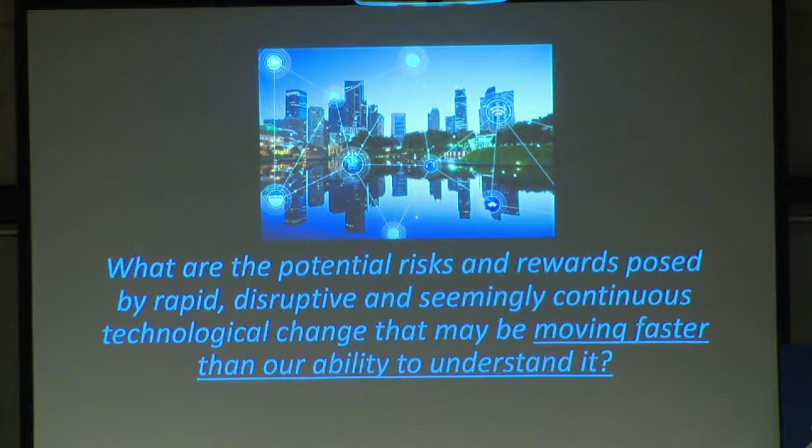I'm going to talk about something that we're living right now. We're living in a time when we have technology that is being used to help us get safe water pipes, help us repair these assets in place, and we need to balance the risks and rewards about how we go about doing this. So as President Daniels mentioned, the purpose of this meeting is kind of balance risk and rewards, talk about the dawn of the technology as well as possible doom if it goes in an uncontrolled fashion. And I want you to keep that in the back of your mind as we go through this talk.

Now, water pipes are critical for the security of this nation as well as others around the world, economic vitality as well as the health of communities worldwide. We rely on water pipes, say here at Purdue University, to provide us water in the dorms, to provide us water at the recreation center, to provide us safe water that doesn't make us sick in other places around town. We also, when we go home, we rely on water for the water parks. Just think of the last water park you went to, and maybe it was filled with contaminated water. Would you go there? Right?

We rely on these things as very important aspects of our society, and they also provide economic vitality. In order for businesses to thrive, they need water. They need to be able to produce, to manufacture, to allow people to come visit the mall, and other aspects of our society. And health of communities, we've touched about before, and it's very easy to realize what happens when you don't have functioning water pipes when you look at the recent hurricanes.

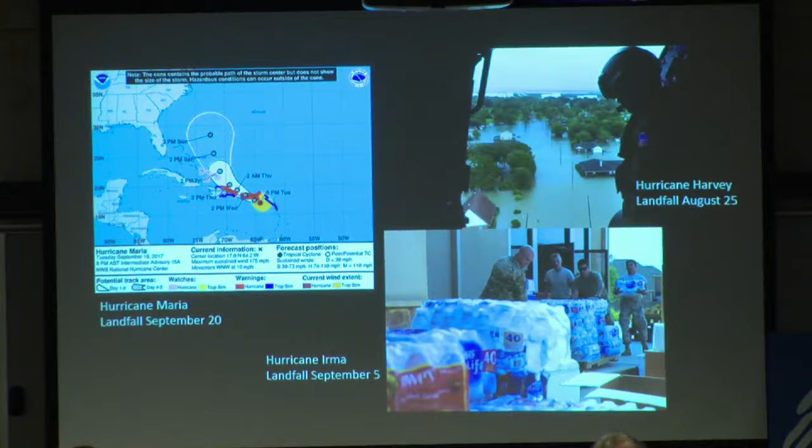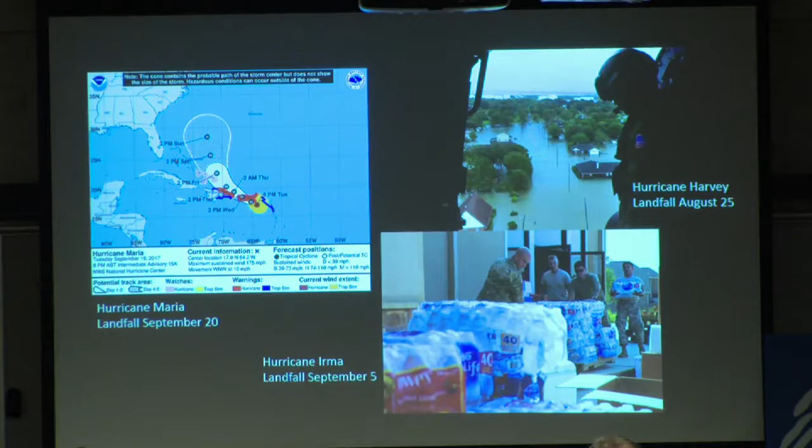Okay? The recent hurricanes that have affected large population centers of the U.S., including Hurricane Maria, Hurricane Harvey, and Hurricane Irma, basically incapacitated water pipes. They filled them up with water, or sometimes there were main breaks, there were depressurizations. You couldn't get safe water to the buildings, and sometimes the sewage in the sewage pipes mixed with the water. Okay? Flood waters went into sewage pipes, and so we realized very quickly in these types of disasters that we really rely on water pipes to convey us safe water that allows us to thrive.

And what you may not know is in the U.S., there are millions of miles of water pipes. Many of these are buried underneath the street or on your property, or they're also inside your homes and inside your office buildings. And these pipes are aging. Many of these pipes were installed in the 1900s to 1950s. And so they're possibly 60, 70 years old. And generally, they're out of sight, out of mind, and we don't really think about it until a wet spot shows up on our ceiling, and we realize that that pipe is now starting to leak.

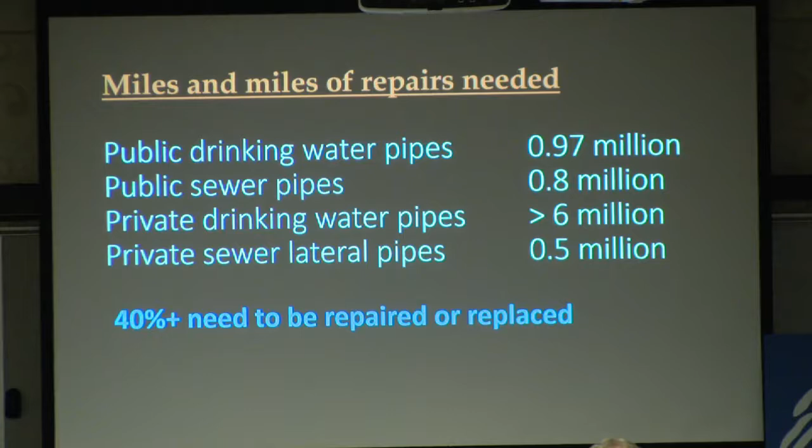Or what we find is sewage starts spilling out into the bay where we used to go play. And we realize that those pipes are starting to leak and damage, and we need to do something about it. Estimates are that about 40% of all water pipes, these are drinking water pipes, sewage pipes, and water that conveys storm water, rainfall when it rains, away from the roadways, need to be repaired, okay? So in my lifetime and in many of your lifetimes, you're going to be responsible for doing this, you, your

friends, and your family. To give you some data, this is a study that was conducted several years ago, and what it was is an inventory of all the buried drinking water pipes in the U.S., what types of materials these were. The materials were steel, cast iron, some of them were ductile iron. And what I want to bring your attention to is we're past due, right? The bills come.

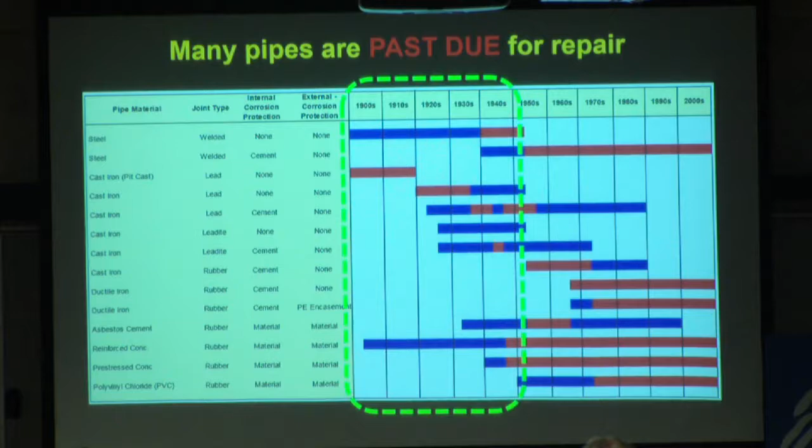We have to repair or replace these pipes here because many of these pipes from the 1900s to the 1950s are still in the ground, are still in buildings, okay? And these can cause contaminated water. They can promote microbial growth and the growth of organisms and pathogens in our plumbing, and these need to be addressed. Now, an often type of pipe nobody really talks about because we take it for granted is stormwater pipes.

When it rains out very hard, the water needs to go somewhere. And preferably, we don't want it to go on the street because we're driving on the street, right? If it goes on the street, you can hydroplane. Anybody ever hydroplaned before? I have hydroplaned. It is scary, right? So we rely on stormwater pipes to basically take that water and send it underneath the street to some other location where it can drain away, okay?

But these pipes also are decaying and falling apart. The issue here is that with these pipes, they go underneath the roadways. And so when you have a pipe fail underneath the roadway, you get a pothole. Or you can have the roadway wash out. So we have public safety issues. The damage can be catastrophic.

And here is the example down at the bottom where we're looking at a corrugated steel pipe. You take metal and you put it in water for 50 years, and with running water, it will erode away. And then what happens is the water isn't going through your pipe anymore, it's going through the soil. And then it's scouring out the soil, and then the pipe can start to mechanically fail.

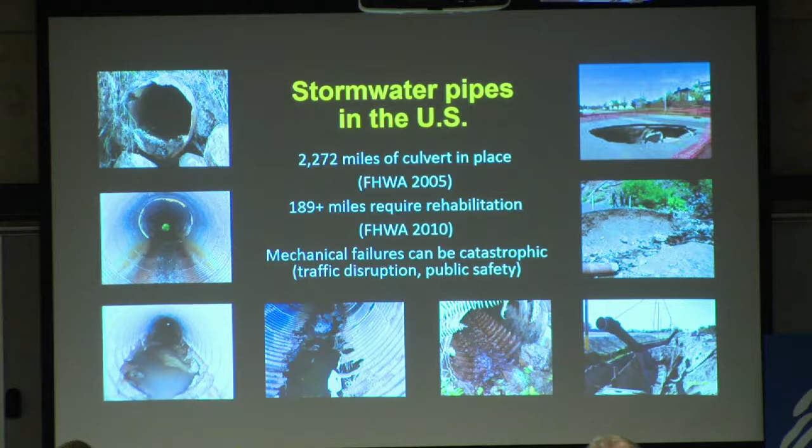So to address these issues, historically what we've done is we've dug up these pipes, primarily because that's the way it's always been. Anybody ever seen pipes being dug up on their street or nearby? Yeah. It can be a pain. It really can. Because, first of all, they send you a letter telling you you're not going to have water for a certain period. Then they're going to tell you that you shouldn't use the toilet, you shouldn't wash your clothes during that time, right? Because they don't want waste and water coming down the pipe to where there's no pipe.

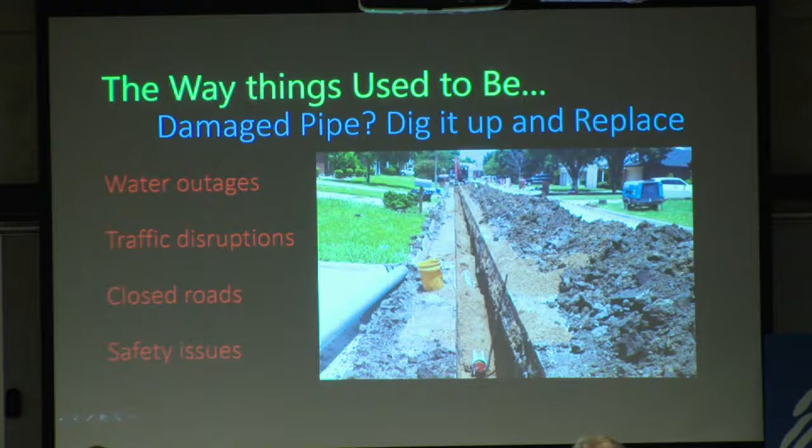Traffic disruptions, try driving a car down that street, right? And so closed roads, rerouting, and safety issues where you have open trenches, where bystanders can fall in these trenches and get hurt, or you can have people at the work site dealing with hazardous conditions. So this is how it's always been until the innovation of trenchless technology. Trenchless technology was disruptive. It still is disruptive. It allows us to repair these pipes underneath the streets and in our buildings without having to rip up all that dirt, without having to remove the walls, remove the drywall.

And there's actually a world celebration tomorrow about World Trenchless Technology Day. Okay? So you Google it, you'll find the website. It's pretty cool.

And one of the most commonly used trenchless technologies in the U.S. is a technique called cured-in-place pipe technology. And cured-in-place pipe technology is the chemical manufacture of a new plastic pipe inside a damaged pipe. So let's say we have a sewer pipe underneath the street. It's cast iron. It looks like Swiss cheese because it's all corroded out. What you can do is insert this liner inside one manhole, pull it through the pipe that's underneath the street as cars are driving over it, and go to the other manhole and see this fabric come out.

Then what happens is they literally manufacture or cure this fabric into a pipe in place. And it's amazing technology in that it can take 2 hours, it can take several days, depending on how thick the wall is and other conditions. But the fact of the matter is, people can be driving down that street, right? All the while, this pipe is being repaired, so it doesn't cause that type of disruption.

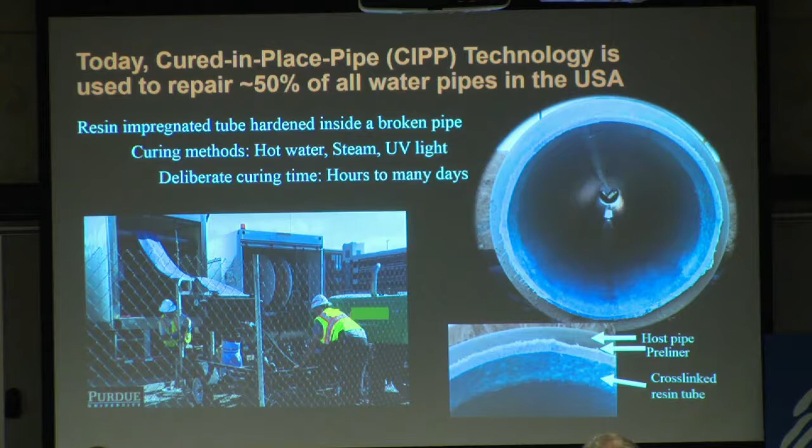Some people have asked me, how long does it last? I've seen 50 years, I've seen 100 years. We know that CIPPs that have been installed in pipes already today have at least lasted for 30 years.

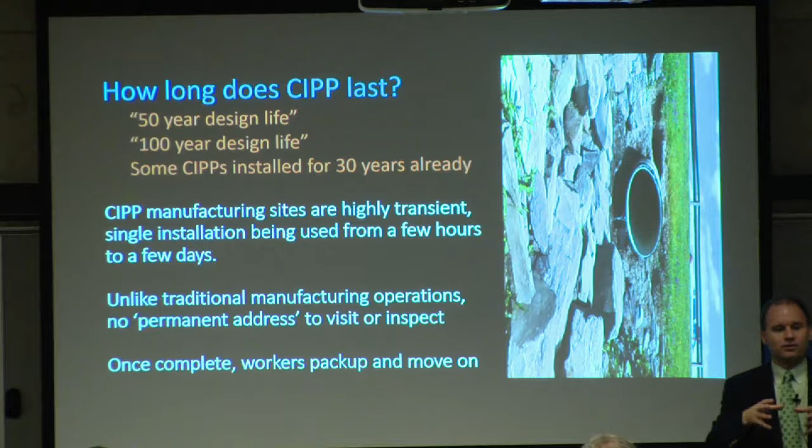Okay? CIPP manufacturing sites are highly transient. They literally chemically manufacture pipes around town. Okay? There's no street address where they chemically manufacture all the pipes and just slide it into the damaged pipe. They literally go from manhole to manhole or side of street to side of street and move during the day. Okay? And once they're done, they pack up and move on.

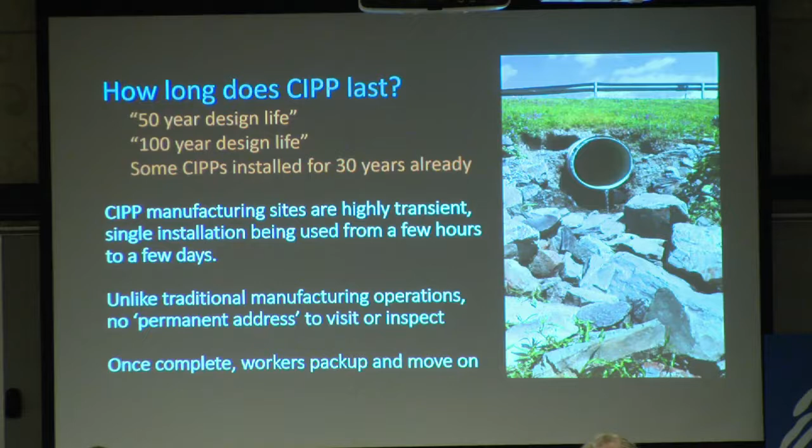This shows you here a pipe that was repaired in a very busy part of New York. Okay? And what you'll see is trucks and traffic driving up top. And what's really amazing is that when they repaired this pipe, they didn't have to shut down the road. They didn't have to divert traffic. And this was, I think it's a 5-lane highway. Okay? So you're talking about major disruption if you have that happen.

So cured-in-place pipe, according to a study that was just released this month, is about a $2.4 billion industry globally. And about 40% of that industry is in the United States. And that's primarily because U.S. infrastructure is so decayed and so deteriorated that we have to do something now. And cured-in-place pipe is the most popular technology being used for repairing this.

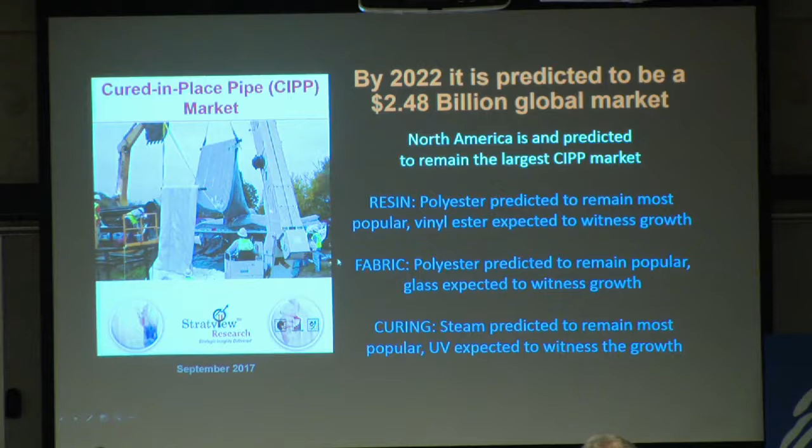There's different types of resins that are used globally. There's different types of fabrics that are used globally. And there's different types of curing methods or ways that you cure these products in place.

Okay. So one of the questions that's come up with this technology is after you insert, say, this blue liner into the upstream manhole, and you start pumping steam in, you have these red lines, and that's these emissions of stuff coming out from that material.

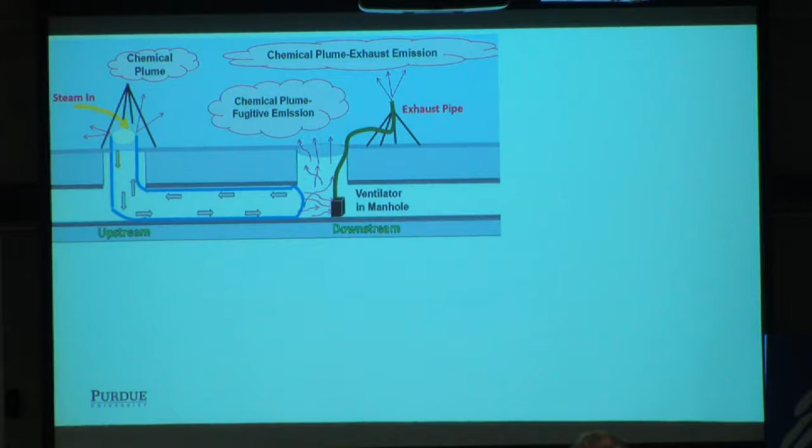So think of a sock like a tube sock, right? And if you fill a tube sock up with water, you'll get water dripping out. And that's kind of like what happens with CIPP when it's not cured yet, when it's not hardened. So stuff comes out. And that stuff sometimes exits through manholes, and it also goes up exhaust pipes that contractors sometimes deliberately put there. Okay? And this is what that looks like.

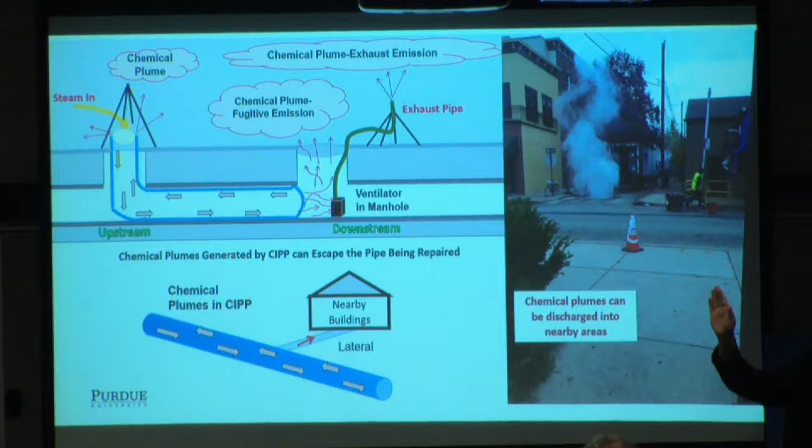And so this is a picture of downtown Philadelphia, where one of the residents took it for us. This is the fugitive emission from the downstream manhole. And sometimes what happens is because pressure is put into these pipes and steam is put into these pipes, it causes emissions to go up into people's buildings, okay? So into nearby buildings. So the big question for us was, are chemical emissions a problem? Is this a technological issue?

And when we started putting some studies together and trying to figure out if anybody has had incidents where chemicals have gone into buildings or caused any health impacts, we started putting together a number of incidents. And most of these are reported in the public literature as well as the media.

And so what we find is that for the red stars, these in the last 20 years that we know about have happened at daycare centers, elementary schools, middle schools, high schools, offices, and homes, where chemicals have either gone into the buildings and caused building evacuations or people to complain about sickness. And offices, some have been contaminated for up to 3 months. So these are some of the incidents that we've found.

One of the issues with these incidents, however, is that often the people responding to the incidents didn't really understand the technologies or what chemicals could be emitted. And there really wasn't much health follow-up associated with the incidents that we found.

There have been some incidents in some places around the country, and those are the yellow stars, dealing with fish kills, surface water contamination incidents, and drinking water contamination when people have used CIPP technology and improperly handled materials or improperly handled the waste that they generated and either dumped it in streams and ditches or other processes. So there seems to be something there.

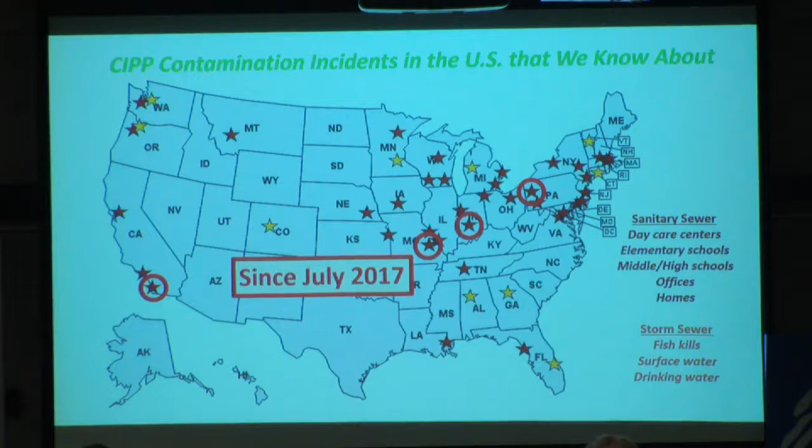And since July 2017, there have been 4 incidents in the last several months. The most recent happened in San Diego, California, where 36 kids were sickened, and 1 went to the hospital because of the emissions from a cured-in-place pipe construction site. And so you can go online and see these videos. They're pretty eye-opening. But the top 2 are from San Diego, California. There's another one from Dublin, California this year.

And then another one here from Nyack, New York, which is right outside New York City. Somebody reportedly needed oxygen in their house because of the vapors that came in from the process. And here's just a list of some of the incidents that we've found. We published a paper, so most of them are listed there. But it's not abnormal to have these types of incidents happen.

So then the next question is, what do CIPP companies and cities say about the exposures? And what we've found basically is that contractors and cities have declared the exposures safe, harmless. You look on Twitter and you'll see cities openly saying that it's safe for people, for pets and people. Don't be alarmed, trying to tell everybody not to worry about it.

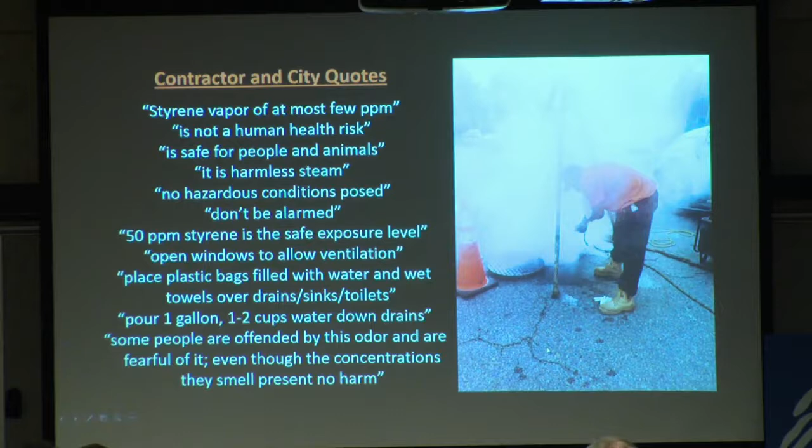There have been some documents provided to the public that say 50 ppm is a safe exposure level given to a family, and that's completely inappropriate because no child should be exposed to 50 ppm of styrene, for example. The 50 ppm is for workers, adults that work in these factories and such. So this is a picture of a city employee at an eastern U.S. city, and what's important to know is he's not wearing respiratory protection.

So the next question is, as a scientist, what does the literature say? And when you look back in the last 16 years, only 4 studies have been conducted to find out what materials actually are emitted into the air. So the first study was conducted in 2001, and I want to bring you on this journey because it leads up to where we are today. There were several buildings that were tested.

This study was conducted in Canada, and they conducted air monitoring outside at a CIPP site right near the manholes. They put some air sampling devices in people's homes where the chemicals may come in, and the highest level they detected was 3.2 ppm of styrene. This is only one chemical of the many chemicals that are used in the process. Also, some of the issues with this study are that they didn't actually report what types of materials were used to create the CIPP and some other issues.

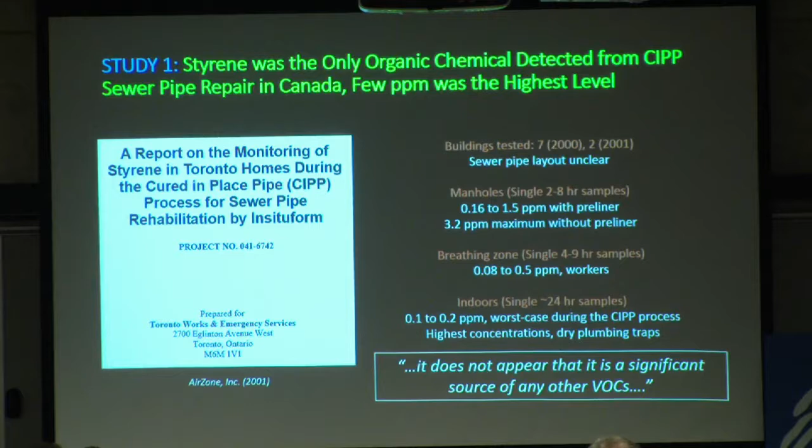In study 2, there was another Canadian study that was conducted to look at emissions from manholes. And the investigators used photoionization hazmat devices. They took these devices and they put them in the manhole and they watched the signal change over time. They reported, this is their data, styrene was present at about 110 ppm, okay, not 3.2, but 110 ppm.

One of the issues with this study, however, is that the device they were using doesn't just tell you it's styrene, it responds to multiple other chemicals. So for example, if methylene chloride was present, the device would respond to that too. And they didn't do any confirmation testing to prove that their signal was 100% styrene.

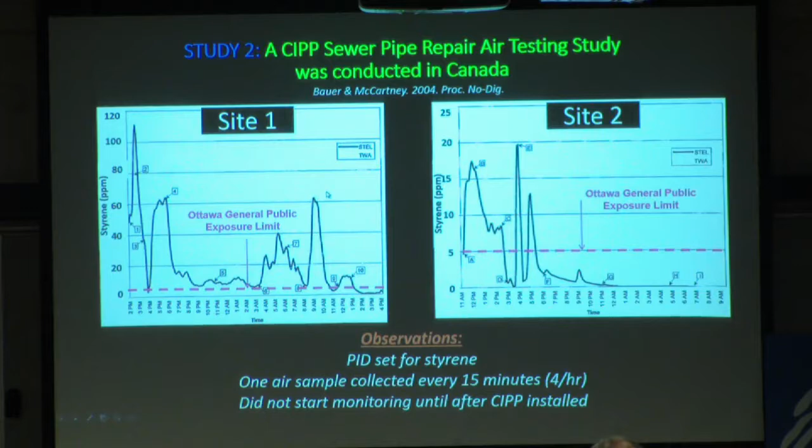Okay. Study 3 in 2005, a U.S. federal agency got involved, and they responded to an incident in Milwaukee, Wisconsin. And in this incident, the contractor was repairing a pipe underneath the building. The vapors went up into the building, and the building was evacuated twice. It remained contaminated for several months, and the ATSDR declared it as a public health hazard.

And finally, there was a study in 2015 that was conducted by a University of New Orleans graduate student and the city of Los Angeles. And what she did was, as part of her internship there, she conducted air testing at 3 different CIPP sites during steam curing. So when they were pumping steam into the CIPP, she took one sample and sent it to a commercial laboratory to analyze, and her data indicate that over 1,000 parts per million of styrene was emitted.

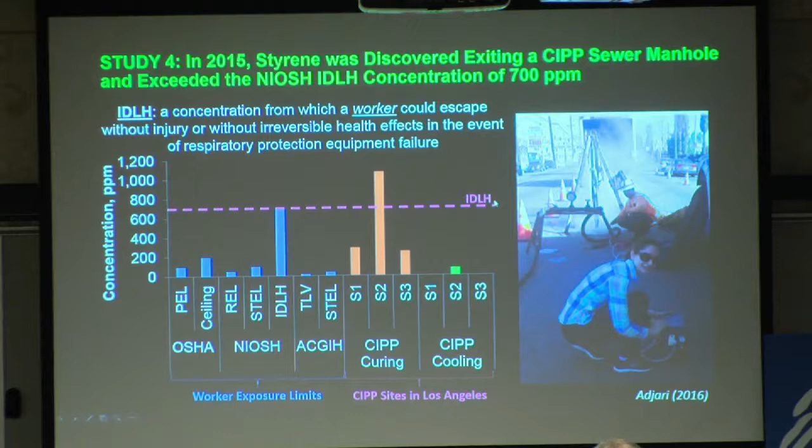Okay? And this red line is what's called the IDLH concentration for styrene, a concentration at which a worker can escape without injury or irreversible health effects in the event of a respiratory protection equipment failure, implying that they should be wearing respirators when they're doing this activity. This gentleman's not wearing a respirator, and she's not wearing a respirator.

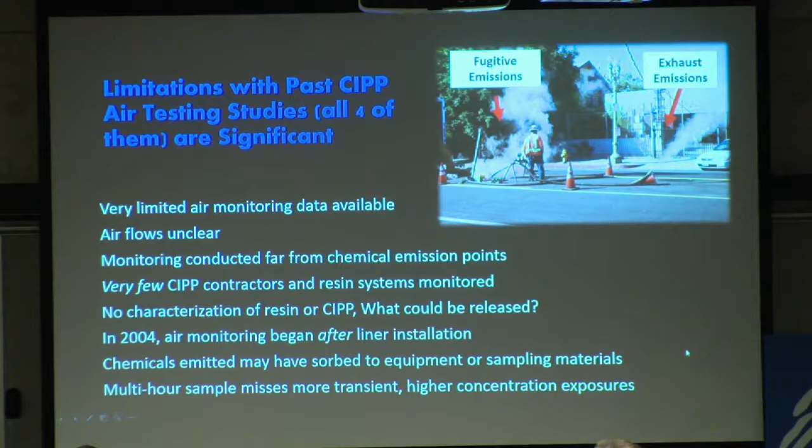So based on those data, what we're looking at is, we have this amazing technology, but what are the risks associated with using it? And we really don't know, primarily because a lot of issues are associated with these prior 4 studies, and not much is out there.

So there have been some prior studies before what I'm about to tell you in the Purdue study, but the prior studies have indicated that at least a steam-cured CIPP process, which is the most popular process used in the United States, can create this condensate. And this condensate we collected down in Alabama from a site.

We exposed it to these organisms called daphnids. So in order to determine how toxic something is, you generally take chemicals and you put these organisms in it, and you go back 24 hours later to see if they're still alive, and you count them.

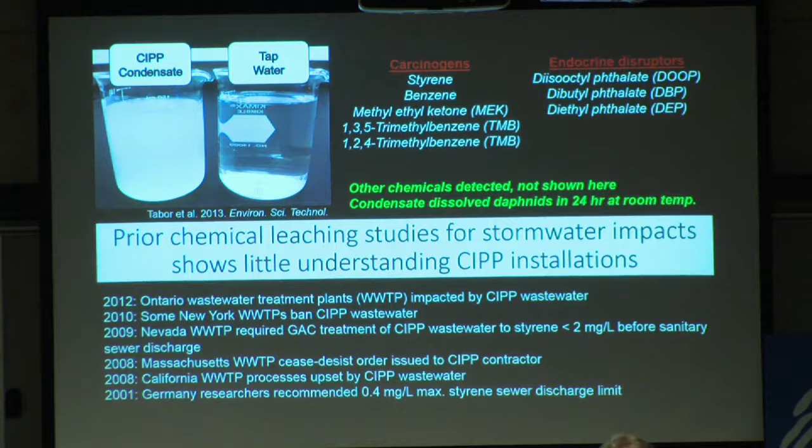And you go back 48 hours to see if they're still alive. And when we take this condensate and we put the organisms in it, in 24 hours, we didn't see anything. So we did the study several times, and what we found out was that the organisms dissolved away within 24 hours at room temperature. So we believe that the process can generate materials that can be toxic, acutely toxic, and the wastes have to be controlled.

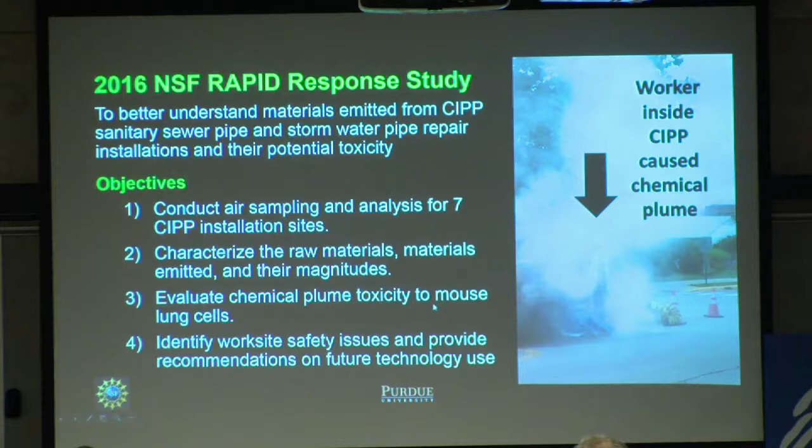So that leads us to a 2016 National Science Foundation Rapid Response Study. This study was funded by the National Science Foundation to better understand the materials emitted from CIPP, sanitary sewer, and storm water pipe installations. This is a Purdue study. There were about 13 people involved, 6 faculty members, and what I want to bring your attention to is the current industry awareness of the materials that are being emitted indicates that you do not need respiratory protection to be in these white chemical plumes, based on the data that we've seen in the past. And so our purpose was to evaluate what's being emitted as well as the chemical toxicity.

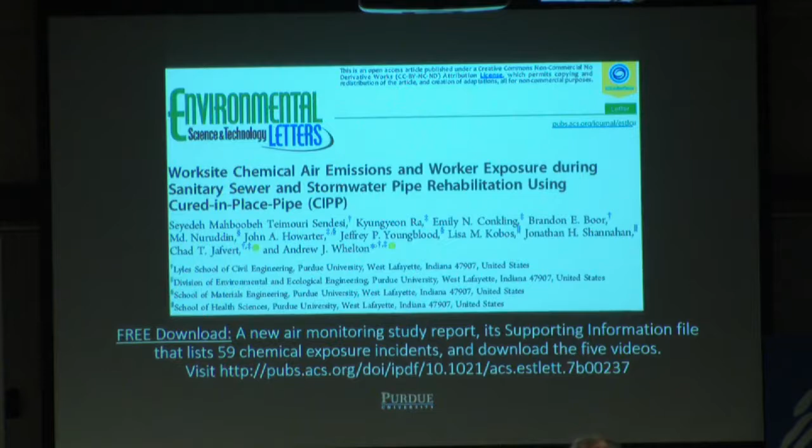And this study has been published. This study came out in July of 2017. It was reviewed by eminent experts in the field that we don't know who they are. The American Chemical Society journals chose those experts to review this manuscript. It's posted. It's freely available online, so anybody can download it. And then you can go to cippsafety.org. We set up a website, and people can go there, look for frequently asked questions about the study and such.

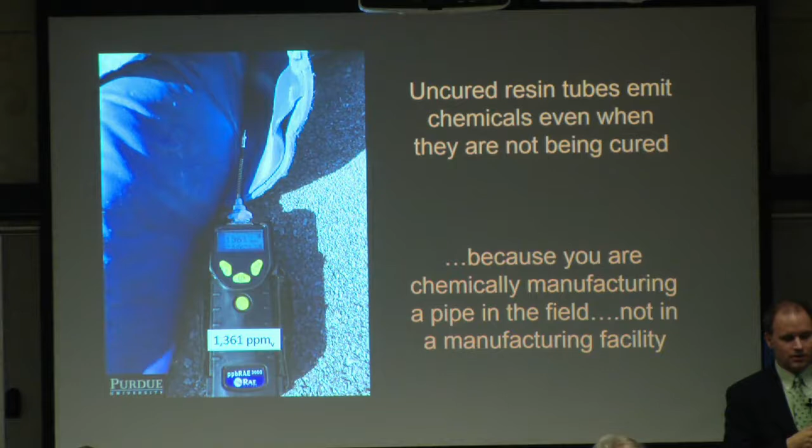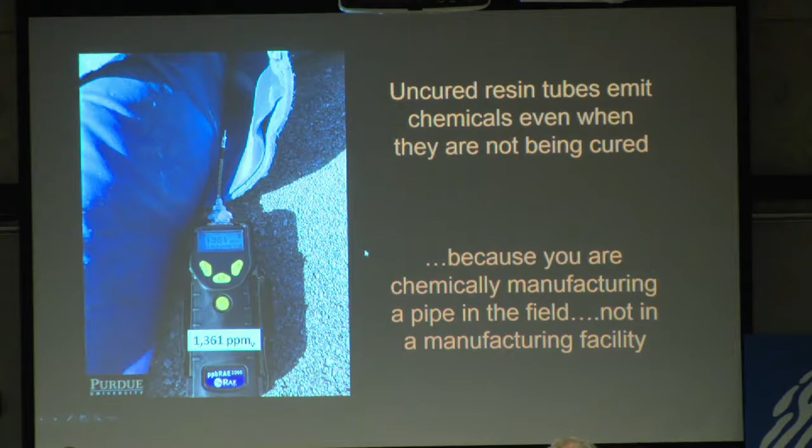One of the main realizations of being on a CIPP site that really hit me was you are entering a chemical manufacturing facility. So typically we create boats, we create these other fiberglass materials in ventilated areas where there's very stringent control, and the only thing you're doing is moving a new boat in and a new boat out. Here what you have is raw chemicals being brought around to different sites under different pipe sizes, under different wind directions and wind speeds. And the raw chemicals themselves give off a signal. So there are emissions from these raw chemicals, and that's important to realize.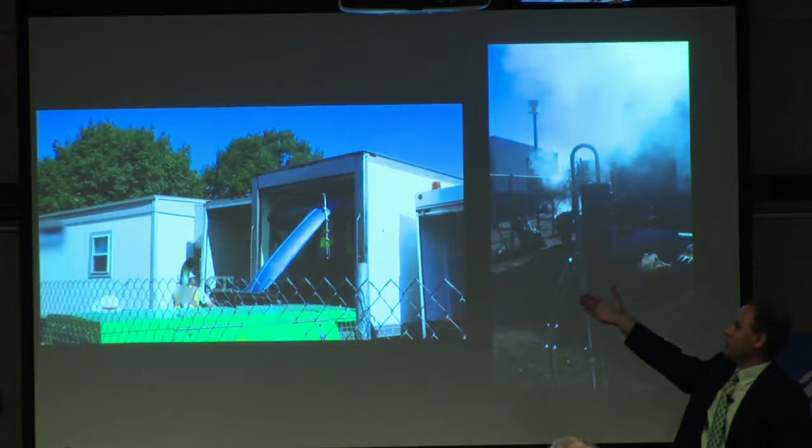What we see here is the uncured resin tube from the refrigerated truck going into the pipe. These are raw chemicals in the fabric that are being fed into the pipe here. What happens next for this situation is they pump steam into it, and then on the other side of it, this is what you see. So this is what's emitted into the air, and as part of our National Science Foundation study, that's our stainless steel unit there. We were grabbing that stuff and trying to collect it to figure out exactly what it is. And what we found out is that it's actually not steam. It is a multi-phase mixture. It is solids, liquids, and gases. This includes particulates, droplets, partially cured resin, and it is not steam.

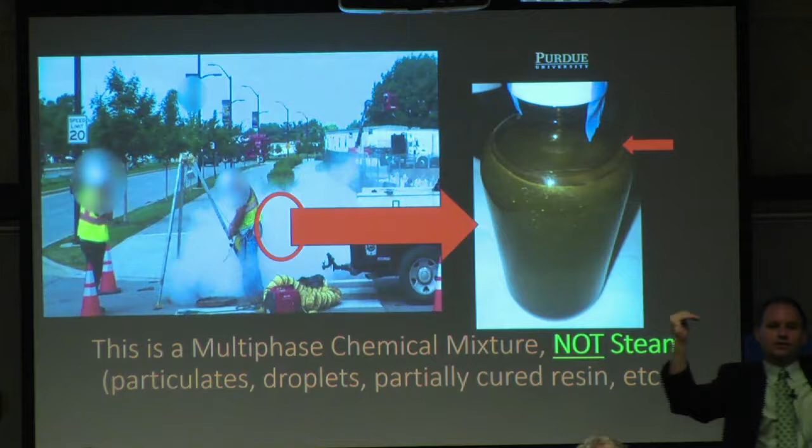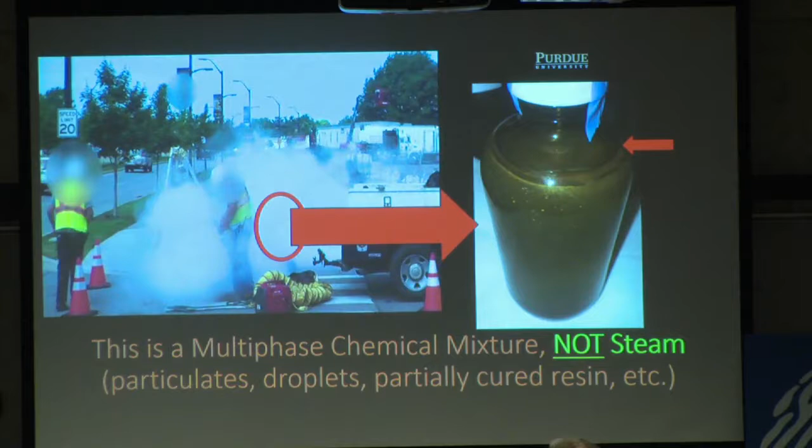This material here is at room temperature, right here. And this material on top, if you take a little bit of that out and put it on the ground, it will evaporate very fast. That is because it's pure organic solvent. So that would be like going to Home Depot or Lowe's and getting the acetone from the aisle and putting it on the ground. That's the type of evaporation that you could see here. Also, the materials engineers characterized this stuff in here. What they found out was it was actually partially cured plastic. So for steam-cured CIPP, when you have an uncured resin tube in the pipe and you blow steam down, there's force. You're creating plastic, but the force is likely taking some of that partially cured plastic with it and emitting it into the atmosphere or into the work site. And so the multi-phase mixture is not steam.

And when we started looking at what compounds are emitted into the air, we found a number of different compounds there at many sites that we tested. Some of these are listed here. Some of them are known hazardous air pollutants, endocrine disrupting compounds, and styrene is reasonably anticipated to be a carcinogen according to the National Toxicology Program.

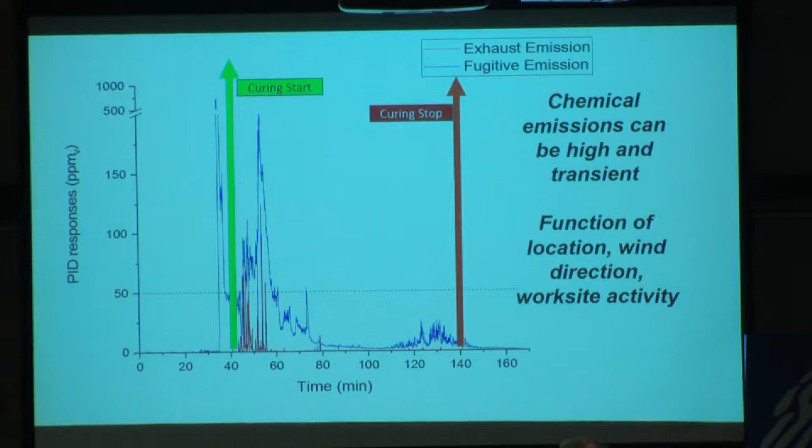Another issue that we discovered on these sites was that chemical emissions can be high and transient. So what we have here is time on the x-axis, and we have the PID response, or that little hazmat unit. We had it stationed at one point, and we monitored that concentration over time. And what we saw is before you started the curing process, you have a blast of chemicals coming out. That is because the steam-cured contractors use forced air. So they pump forced air in there, and it basically likely strips the chemicals out into the air, and they then exit the site.

Then they started the steam curing process, and the chemicals were emitted into the air here. And then over time, the emissions decreased. Okay? And then they stopped the curing process, and they switched to cooling down the pipe. So they'll start blowing just air in it, not steam anymore. And this is a function of location, wind direction, and worksite activity.

Okay? One question here. So if you're going to say, well, I need to know what the maximum concentration is for exposures, what do I need to be worried about? If you go out like past studies and either take a 2-hour sample that just for 2 hours sorbs stuff to that sample, you will average out the maximum amount, so you won't actually know what that is.

Secondly, if you take a grab sample like happened in Los Angeles and you suck air into just a bag at one point and you send it to a lab, you could be missing the peak. So you may not know exactly what the concentration is. You may be getting data that is representative of the site, but not worst case scenario.

Okay? So the toxicologists that we're working with took some of this condensate, and we exposed it to mouse lung cells. And what we found is that there's 2 ways to read this graph. First and foremost, this is cell viability. This means the cells survived after 24 hours. And if it's less than this line, then that means they didn't survive.

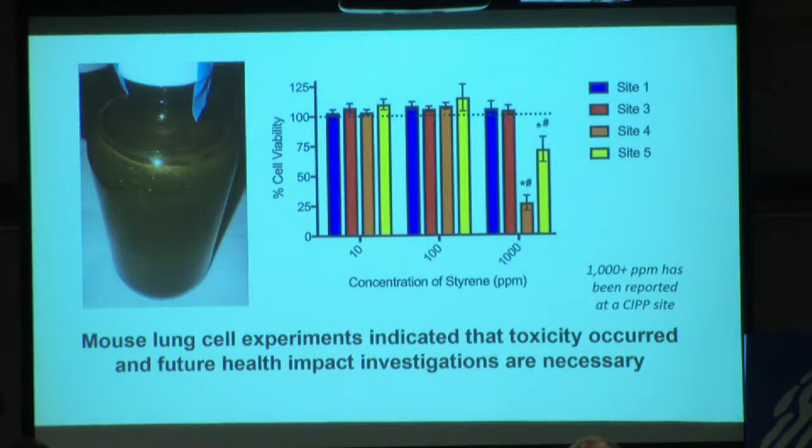Okay? What we found is that some of the cells did not survive that were exposed to site 4 and site 5 condensate. Okay? 2 different sites. What we did find is site 1 and site 3 condensate didn't cause the cells to die. Okay? So there's likely operational conditions that can be used that wouldn't cause toxicity in the materials that are emitted into the air. Okay? We think future health impact investigations are necessary.

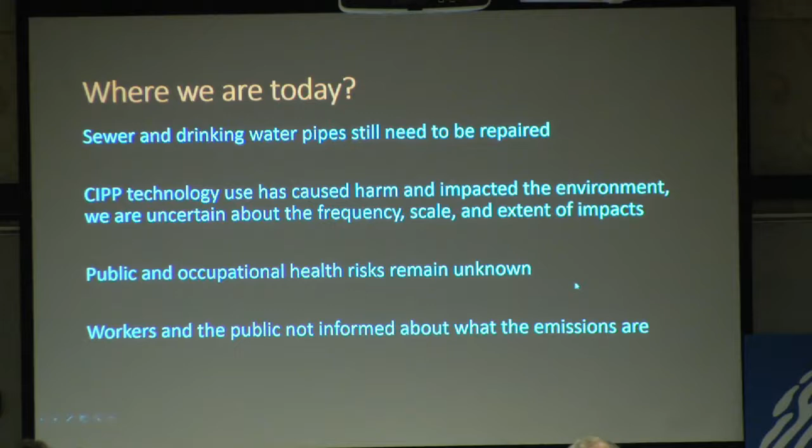So where we are today is pipes still need to be repaired. Some of the CIPP technology has caused harm and impacted the environment. We're not certain about the frequency, the scale, or the extent of impacts because there really hasn't been a concerted nationwide study to figure that out. Public health and occupational health risks remain unknown, and workers and the public have not been appropriately informed about what the emissions are.

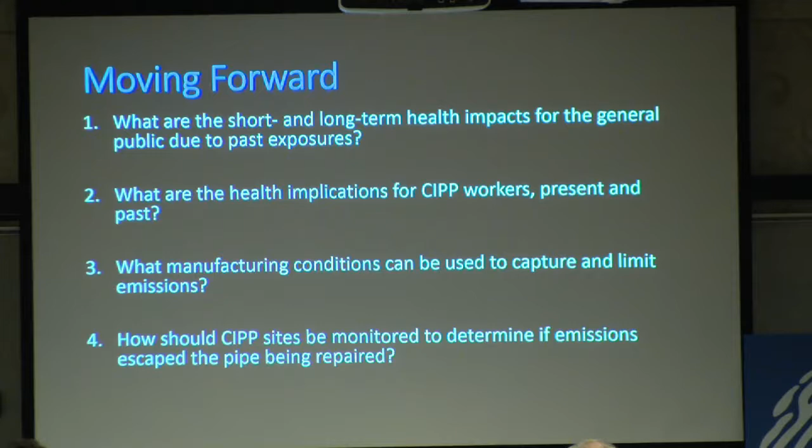So moving forward, we have some recommendations in terms of what needs to happen. We recommend that the federal government sponsor a study to investigate short and long-term health impacts for the general population that is exposed to these materials, but also for the workers that deal with this every day. You can create manufacturing conditions used to capture and limit emissions, and how should sites be monitored. Okay? So the dawn of this, right? We've talked about really heavy stuff here, the significance of a technology that has amazing rewards and possible risks.

Well, there's different classes and groups of people that can do something about this. And I can tell you already that there are very altruistic people in industry that are doing the right thing in terms of taking steps towards making changes to better protect themselves, their workers, and the public, because the technology is pretty innovative.

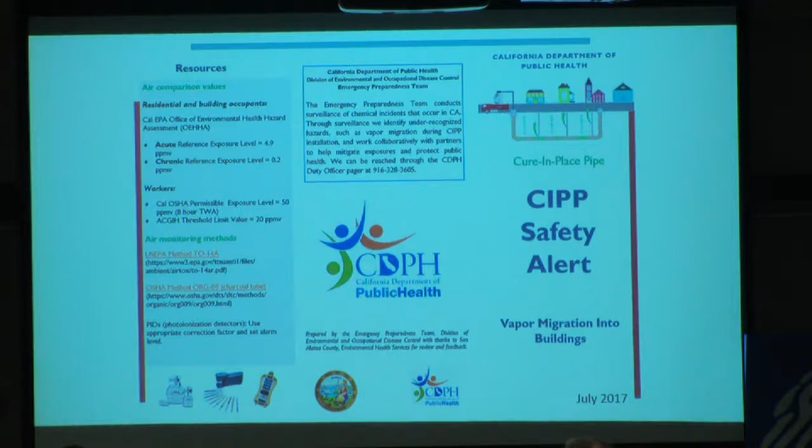In July of 2017, the state of California issued this. They issued an alert to all of their public works departments and health departments, warning about the potential exposures by the public due to CIPP technology. So health departments are starting to pay attention now about the possible risks associated with this technology.

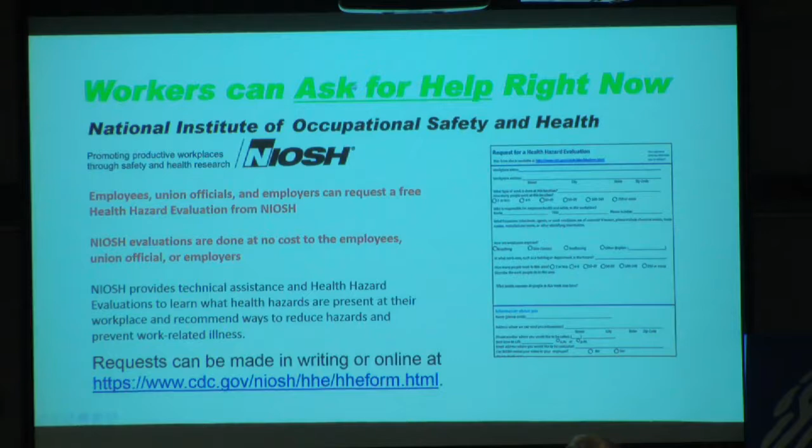CIPP workers can ask for help right now. They can call NIOSH right now. They can email NIOSH right now. NIOSH will come in and do an evaluation of the work site, of work practices, and they do it for free. So there's really nothing stopping companies, employers, and unions to do this. Okay? Workers can also go on CDC's blog right now and read up on cured-in-place pipe technology and emissions and current practices.

Workers can learn more by participating in a webinar. We have a webinar October 5th with NIOSH, the National Environmental Health Association, to talk about some of these risks with CIPP technology and how to mitigate their hazards. Okay? And here's that webinar.

Engineers, Purdue is an engineering school. Engineers have a duty to uphold public health, safety, and welfare above all in the conduct of their duties. Many engineers take this very seriously, and I will say one engineer that I know takes it very seriously. There used to be a video up online where the engineer was there saying that the emissions are harmless, not to worry about it, and then after the study came out showing that the emissions are not harmless, we can't say that in all cases, they removed the video. Okay?

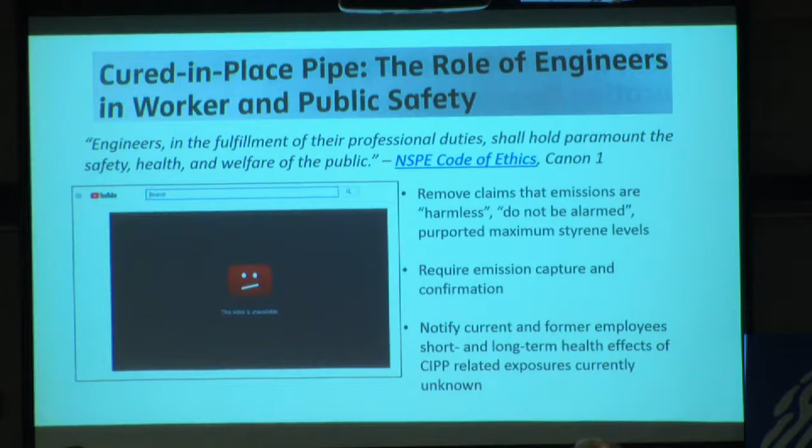So making sure that claims about emissions are correct, making sure that the emissions are all captured until we determine that they are not a health risk, and notifying current employees about the potential long and short-term health impacts.

So in closing, where we are today is you may not be a CIPP worker, you may not be in the water industry, you may not be a regulator or health agency, but you are part of our social fabric here, and you live somewhere and likely have family and friends that live somewhere. So my advice to you is pay attention. Find out if CIPP is being used in your community.

Request that they capture all emissions, that they are not released to the atmosphere or work site or up sewer laterals. And ask your local health department to participate in monitoring and understanding cured-in-place pipe processes.

You can also contact your congressional officials, and I think this would be a great idea if not only health departments asked for this, but CIPP companies and industry asked for the National Institute for Occupational Safety and Health to come in to conduct an independent study of worker safety, because we all care about one another and the health and well-being of each other.

We want to make sure that those persons are best protected, because we cannot rebuild our infrastructure on the backs of people that could be affected and not be around to enjoy it as much as we do. We also need to ask additional investigations to be conducted to understand these health impacts.

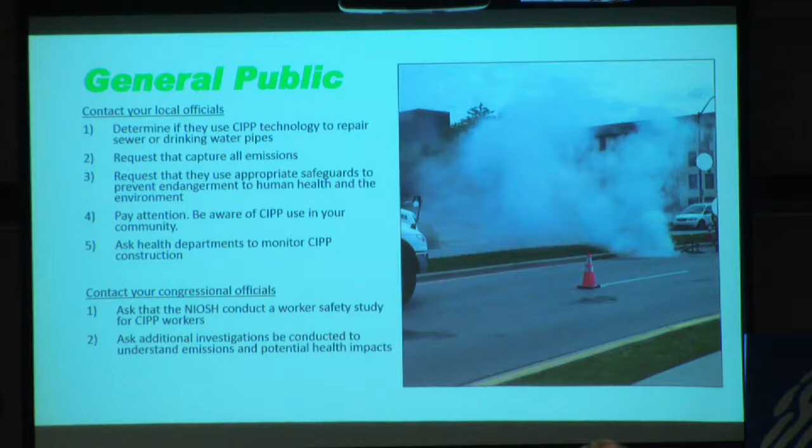Okay? So going back to the purpose of this presentation, right, is cured-in-place pipe technology moving faster than our ability to understand it? I don't think so. We understand it, but it has become widely used. 50% of all water pipes in the U.S. are being repaired by this technology. You probably can't talk to anybody in the drinking water, wastewater, or stormwater industry that hasn't heard about it.

Okay? But we don't have a body of evidence that describes how to make certain that there will not be short or long-term health impacts, or how to prevent them. And our position has been CIPP is a great technology, it's innovative, it provides an amazing service, and can likely be used without endangering human health and environment if safeguards are instituted.

In closing, there are over 30 people that contributed to this National Science Foundation Rapid Response Study. I have several pictures up here. And the amazing individuals, they're material scientists, they're toxicologists, they're environmental chemists, as well as many other people that are not here. Utilities, safety, all sorts of amazing individuals that contributed to this. And I'm just here to talk about it.